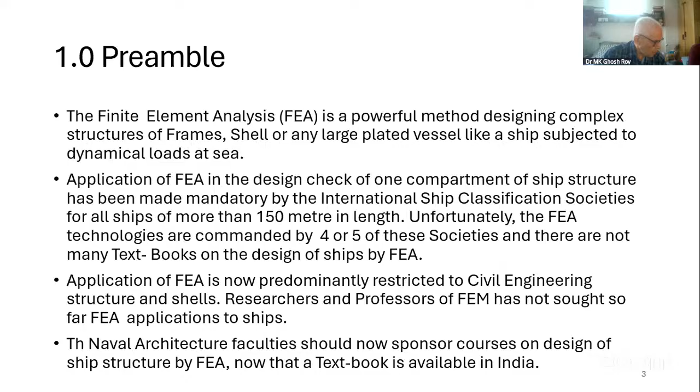Here, this is part of a deck plan of a ship. This is the after bulkhead, this is the forward bulkhead. This deck area has been discretized into rectangular elements. This is the finite elements.

Defining ship finite elements: to apply the finite element method to ship structure, we need to discretize the ship's plated body continuum into many finite elements, as shown in figure 1.1. Those elements are assumed to be structurally connected only at their corners, or nodes. This is the element, and these are nodes 1, 2, 3, 4. These adjacent elements are connected only through the nodes. The sides are free—so this is how the element is treated.

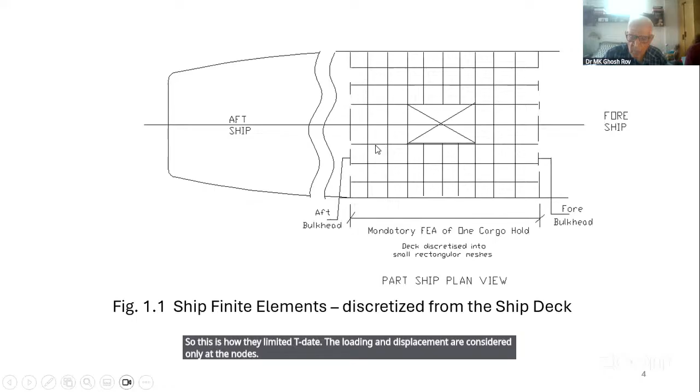The loading and displacement are considered only at the nodes. In this discretized condition, the stiffness of each node, called the stiffness coefficient in FEA technology, of every finite element is derived. We will gradually develop the method of deriving the stiffness coefficient. We are familiar with the beam theory in strength of materials—the beam is really a one-dimensional finite element. Similarly, each small rectangle of the ship deck, as shown in figure 1.1, is a two-dimensional finite element. In the following section, finite elements are discussed in some detail.

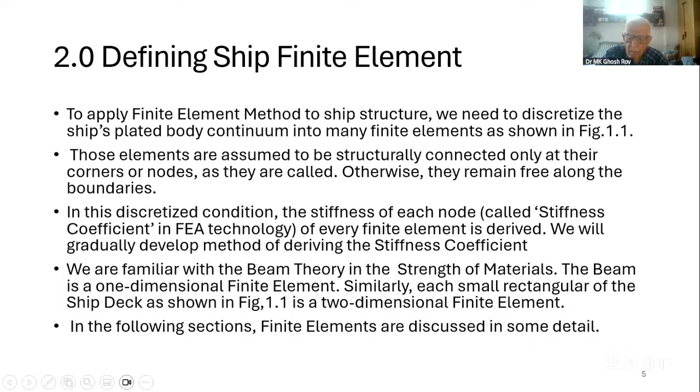This is a beam. It has a load here, but normally loads are transferred to the nodes. So this is a node—there are moment loads M1, M2, and R1, R2 are the nodal displacements at the nodes. This is a node, this is a node, this is a single element. So displacement is R1, R2, and moment load is M1, M2.

And connectedly, we have stiffness coefficients termed K11, K12, K21, K22. This is K11, this is K21—this is the stiffness. This is the load, but actually the force required to get a unit displacement, here a rotation.

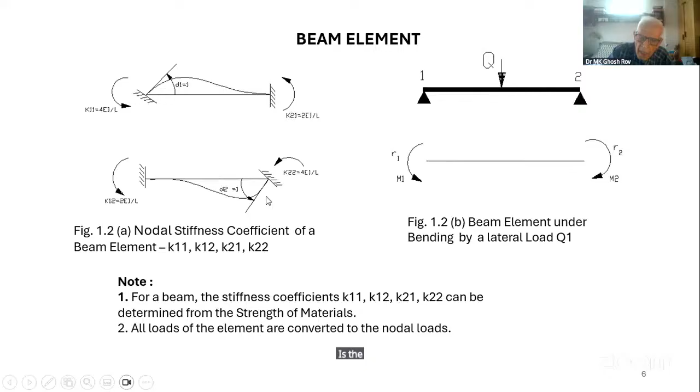So here is a displacement at node 1 and node 2, the displacement is D2, this is R2 really. With respect to the figure, I'm showing a beam element loaded by end moments M1 and M2, and undergoing nodal rotation R1, R2. Then the nodal stiffness coefficients K11, K12, K21, K22 are defined as below.

K11 is the load moment required at the beam end node 1 to rotate the same node by unit displacement. So this is the part stiffness at node 1.

And there is an additional load stiffness K12, the load experienced at beam end 1 while the other beam end undergoes unit displacement. This is as respective to node 1. And node 2 similarly.

K22 is the load required at beam end 2 to enable the same end to undergo unit displacement. And K21 is the other part at node 2, the load experienced at beam end 2 where the other end, node 1, undergoes unit displacement.

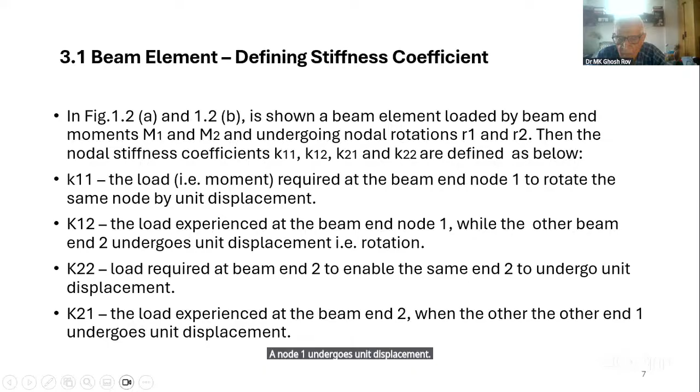So end rotation, the degree of rotation freedom, is called R1 and R2. This value is usually unknown. End moments are M1 and M2, this load we know. Nodal stiffness we know, but we can derive and know K11, K12, K21, K22. I'll show you afterwards that they can be derived, and by derivation we know them.

Degree of freedom at node 1, and also node 2, is 1. This degree of rotation is about how many axes each node can take, 6 displacements. Here I've got only the one moment, so 1 degree is there. Here also, M2, 1 degree of freedom.

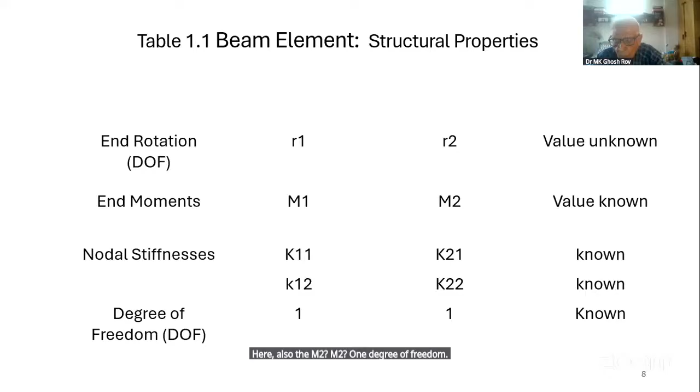Nodal equilibrium equation for beam element: when you multiply the stiffness with R1, we get the load here. And the part 1 of the stiffness and part 2 of the stiffness - this is due to the rotation of node 1, and this is due to the rotation at node 2. This equilibrium equation we write in the matrix format here.

This is the stiffness matrix, displacement vector, load vector. As you know, in matrix treatment, this is the multiplication, this is also multiplication. Rows into columns is this true. We'll proceed further.

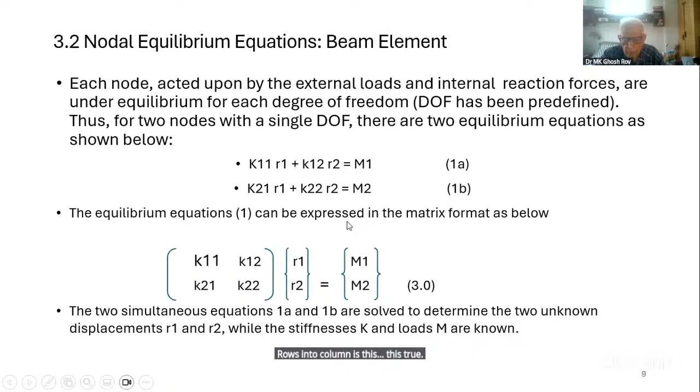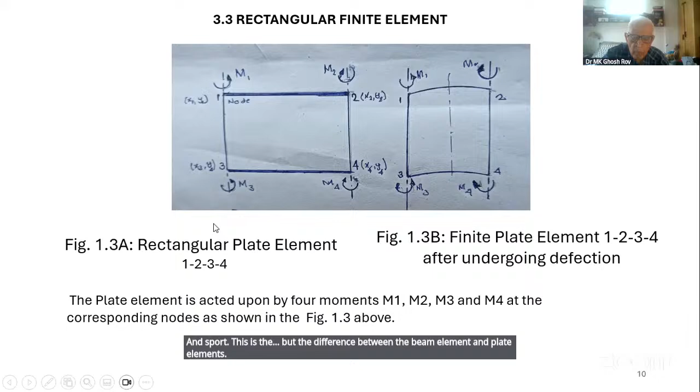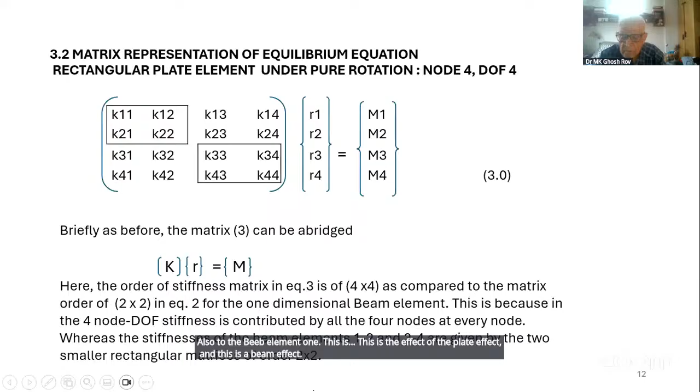Here I am showing in a matrix form. If it was 2 beam elements instead of a plate, this is the upper beam element, this is the lower beam element, and because of the presence of the plate, stiffness has transferred from 3 and 4 also to beam element 1. This is the effect of the plate, and this is the beam effect, for each node.

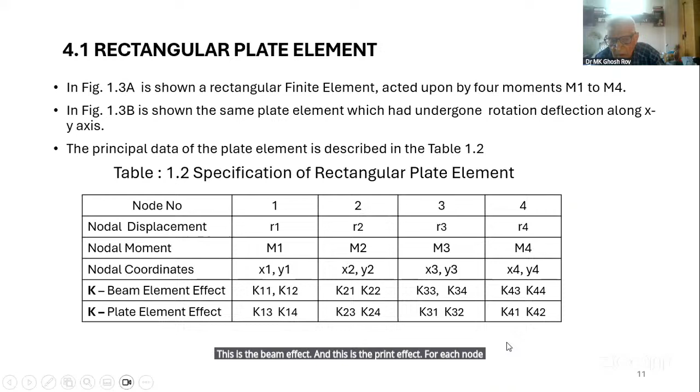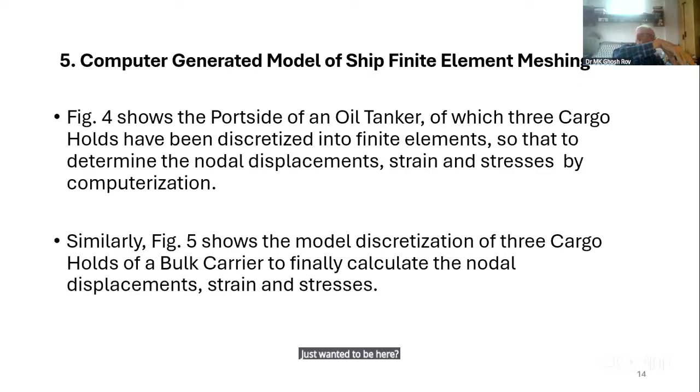This is the same thing I have said. Now my part 1 is finished, Vijay. Thank you very much, sir. One minute, Vijay, I have to go back. Part 1 is finished. Okay.

Okay, part 1, no, this is anyway finished. I will want part 2. Is there any interactions? You cannot, we cannot go back to the screen. Yeah, we can. Stop.

So, Mr. Dasgupta, is there any queries? Yes, sir. Thank you. Then I'll talk, okay.

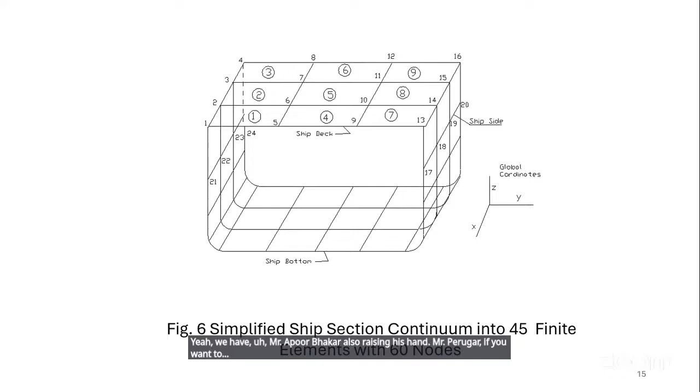Thank you, that's the mouse. Hello, okay. Yeah, yeah, we have got part 2. Yes, sir. Part 2 is the primary ship finite element, we will show. Yeah, Mr. Kaur and Dr. Sinha, we have, just, I'm talking now, give the lectures. No further question. Please go ahead, sir, please go ahead, yeah.

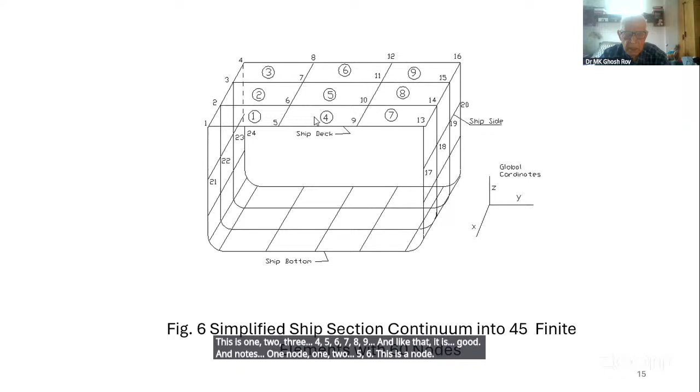This is the ship sections. A simple model I have made here: deck, bottom, ship side, ship side. We have discretized it in 45 finite elements. This is 1, 2, 3, 4, 5, 6, 7, 8, 9, and like that it is going. And nodes, one node, 1, 2, 5, 6. This is a node. This is element 4. Element 4 has 5, 6, 9, 10. Another element, and 4 nodes here.

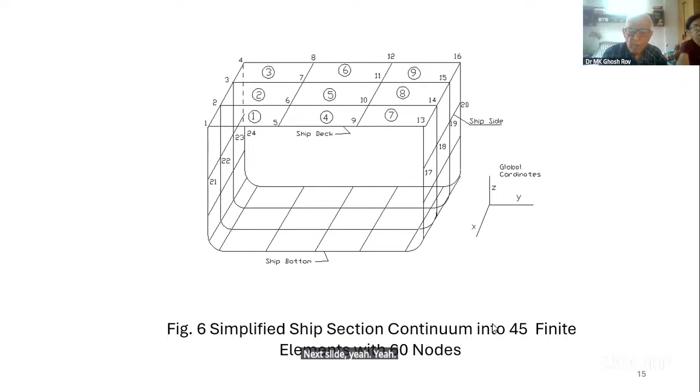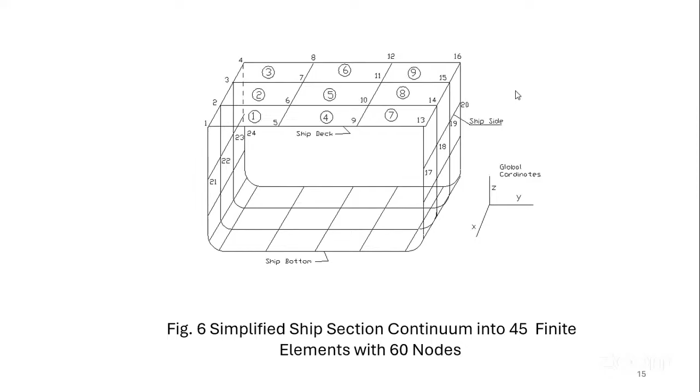Vijay. Vijay. It's not going to the next. Next node is, next slide, yeah, just 1 minute. Yeah. Oh, stop, no. Stop sharing is. Okay, no, it's not going. Okay, I'll directly do it. Huh? Yeah. No. Not.

So the same ship sections, a rectangular finite elements, 45. Deck assembly 16 nodes, two sides 32 nodes, ship bottom 28 nodes. Some of the nodes are common. We leave that, 60 nodes.

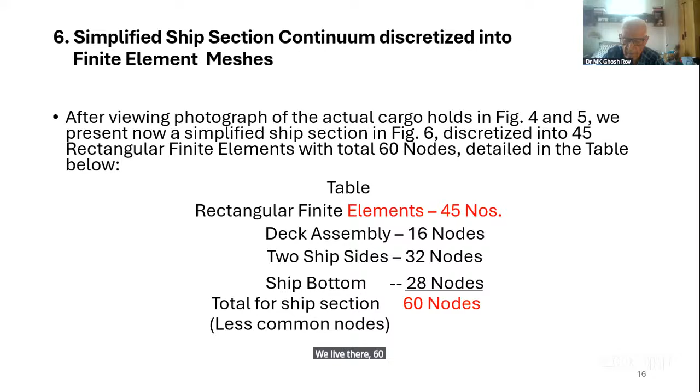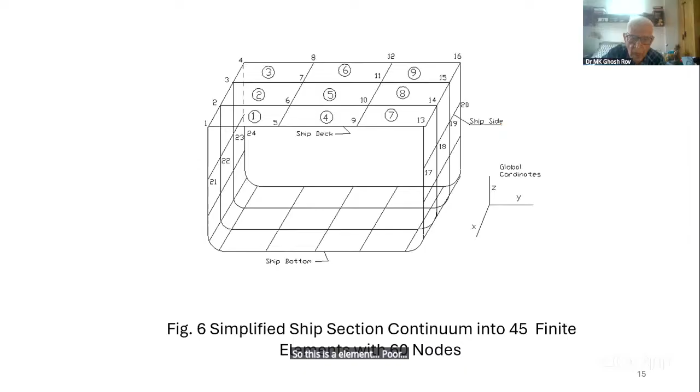So this is element 4. This is element 4. This is the element 4 we'll be talking about of this section. So this element 4 has got 4 nodes: 5, 6, 9, 10.

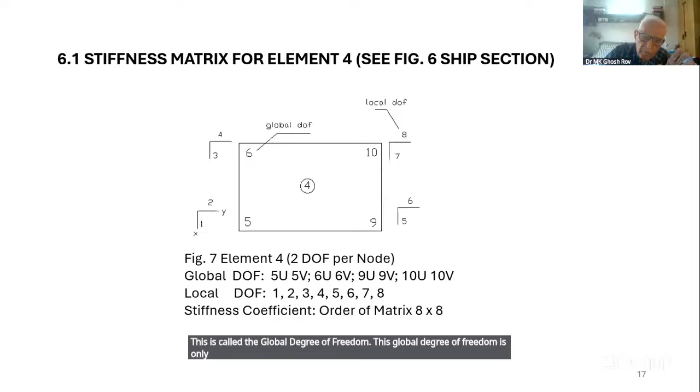This is called the global degree of freedom. This global degree of freedom is only serially numbered, but we have also, for calculations of the node itself, we have local axis called a local DOF: 1, 2, 3, 4, 5, 6, 7, 8. So here in a matrix form, this is the global degree of freedom, 8 degree of freedom.

Each node has 2 displacements. This is 2 DOF per node, so total 8 DOF, which is indicated by the local DOF 1, 2, 3, 4, 5, 6, 7, 8.

So here you can see that each stiffness is contributed from each node and for each DOF. Node 1 influenced by displacement of 1, node 1 influenced by displacement at node 2, then 3, 4, 5, 6, 8. So node 1 is contributed by the stiffness due to the displacement of node 8, DOF 8. So this whole 8 by 8 matrix represents the stiffness of element 4, K4.

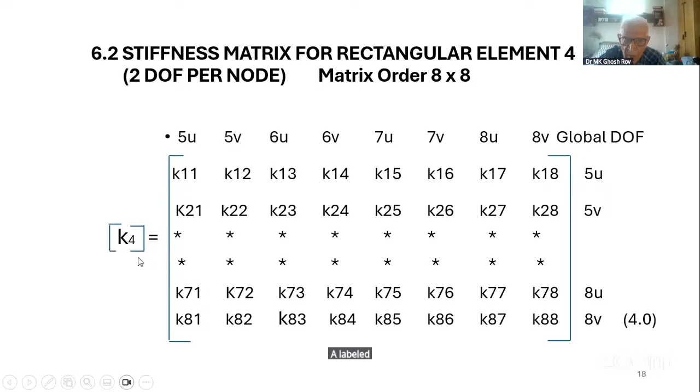Element 4, this is element 4, its stiffness is K4. And each point, there is a part of the stiffness, 8 in total.

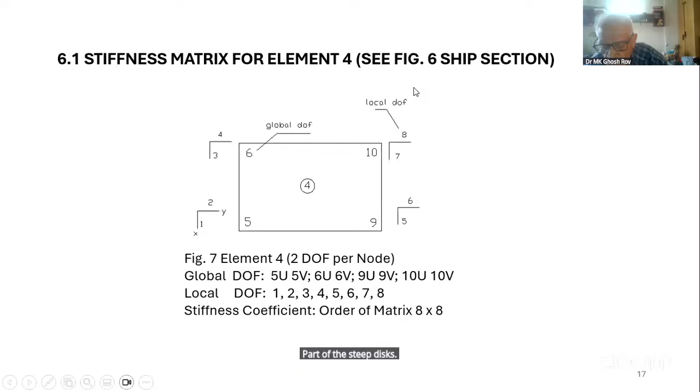Now in these discussions, we have got several functions, but it's important that here we are discussing displacement function N. Then we will have displacement function B, and stiffness coefficient already introduced, K. So N, B, and K are very important functions in the analysis of finite elements.

So here, displacement inside the element is in terms of the nodal displacements. Nodals, we have now recognized the nodes, the corners. So corner displacements, 4 corner displacements in this case, are a function N, displacement functions. So we can determine the displacement at any point if we know the displacement function, also called the shape functions, and the nodal displacements.

Since it's because of 8 degrees of freedom, the element displacement of a 4-node element can be represented with 8 constants. So here, displacement U in the x direction, V in the y direction. This is because of 8 degrees of freedom, 8 constants can be used. These are constants alpha 1, alpha 2, alpha 3, alpha 4.

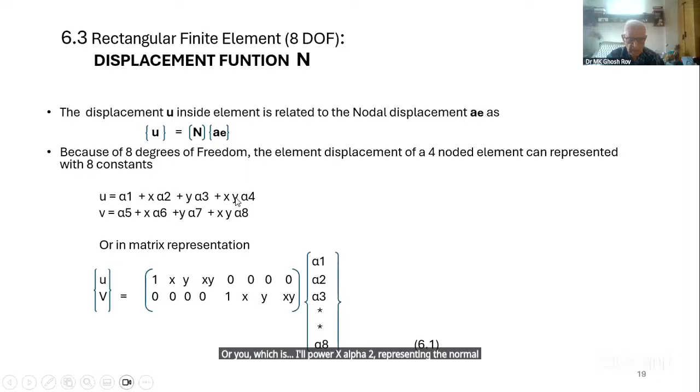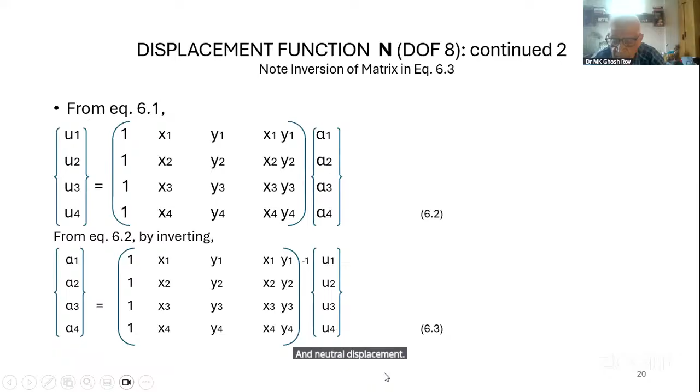So altogether, we have the internal displacement inside the element, the connection matrix here, and instead of alpha 1, alpha 2, we are writing this part. So U equals the connection matrix, this is the inverse matrix A-1, and this is the nodal displacement. Now this is also equivalent to N times A, which we showed in the first figure.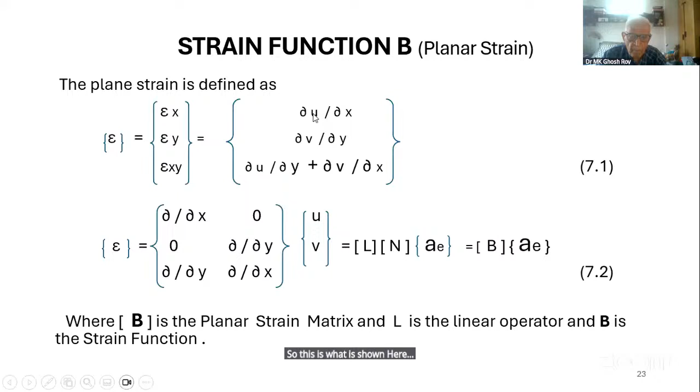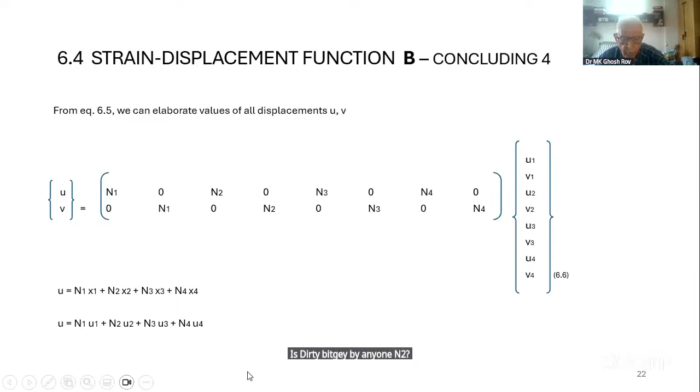This is u, shown here as u equal to N1 times the displacement function coordinate. So the derivative of u is the derivative of N1, N2, N3, N4. This gives the strain, and the derivative of N1, N2, N3, N4. The zero is only for positions because the column consists of u and v; the first line v is 0, and the second line u is 0, and shear strain is not required there.

So this whole matrix is called the B matrix, the strain matrix. So epsilon, this column epsilon, equals the B matrix times the nodal displacement. So from there we got the strain, which is B matrix times A, the nodal displacement.

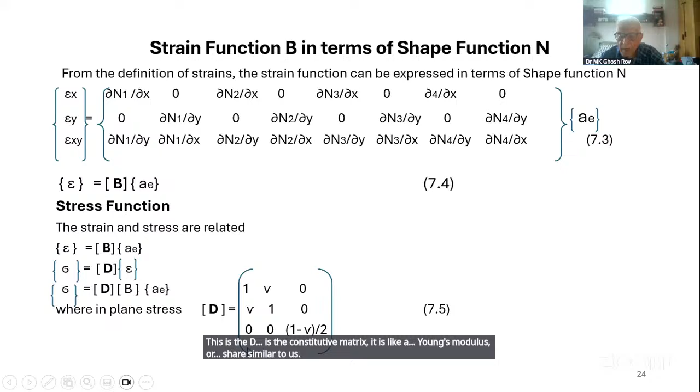We have finished part 2. Any clarification needed? We go back to part 2, we have cleared it, and we go back to this original. Anyone else for clarification?

You don't have to restart, just sit. So I would suggest that you go through the part on stress and strain from the matrix, which is very well appreciated. Please go ahead with part 3, sir. Okay, thank you. I shall have a go at the combined part, interaction, at the end of part 3. Thank you, sir.

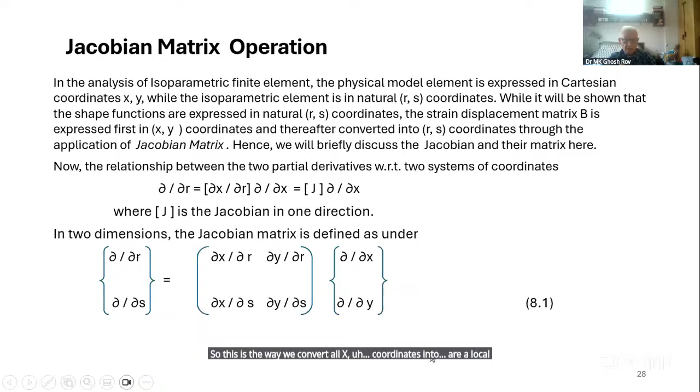So this is the way we convert all X coordinates into local coordinates R and S. Here, this is briefly written: del R, del S, del X, del Y. But we want to convert the B matrix, which is in Cartesian coordinates.

So the B matrix is written here in X and Y, to convert it into R and S. This is a requirement. For that, del X comes here, del R comes here, and it is inverted. This matrix is inverted, so the inverted matrix is defined here. I would not go into details. This is divided by the determinant, and this is the way to convert it. We did not go here just now.

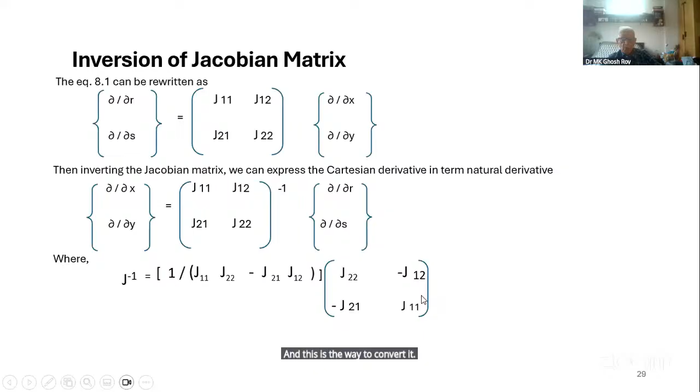So here you see there, a shape function in xy naturally is given by inversion. This expression gives the derivatives in x and y and the derivative r and s. This is the Jacobian matrix.

So this rectangle is converted to the natural rectangle by this J, and inversion of J is this. So the inversion of J is here, we converted here. This is multiplied, we get B, which is in Cartesian coordinates, into RS coordinates. All coordinates here are R and S.

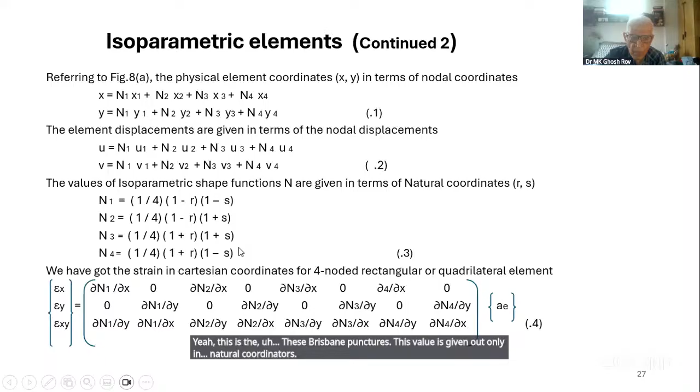So values in N in R and S is given, and before, they are converted to R and S values. Here, this is the displacement functions. This value is given only in natural coordinates. So Cartesian coordinates B has been converted to B in RS coordinates here. Then it is simple to derive further. So we will stop here.

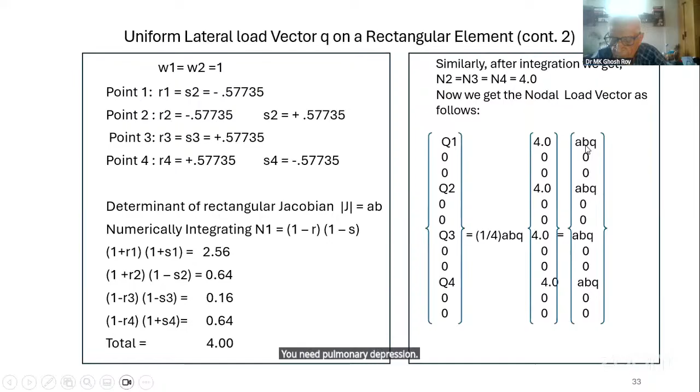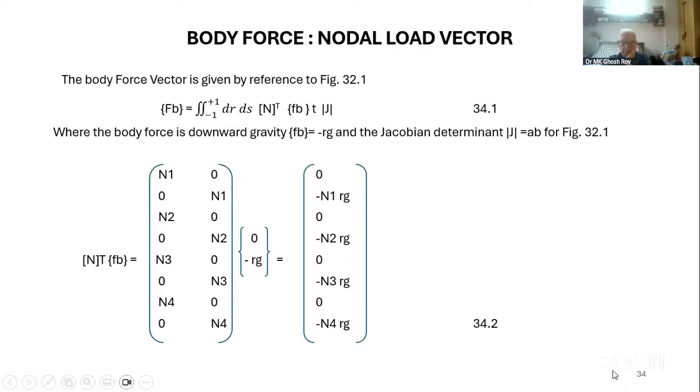This is the numerical integration at 4 points we integrate. So this is only integration, N1 we are integrating. So 3 other shape functions N2, N3, N4, the same value you will get. And finally, body force also, it is a constant, tab 1/4 the value, tab RG, tab RG, tab RG, tab RG. It is minus, a negative direction, downward.

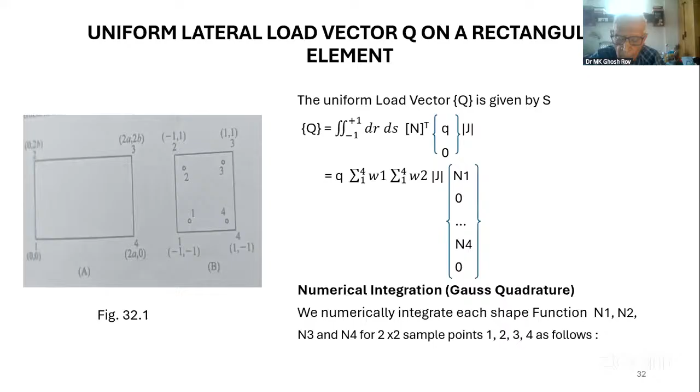This is one page I missed. How to determine stiffness coefficient. We have developed derivations of N, derivation of B, N shape function, displacement functions, and B is the strain function. But stiffness coefficient we have not, and load function also we have not. That's a little difficulty. I said I'll do later.

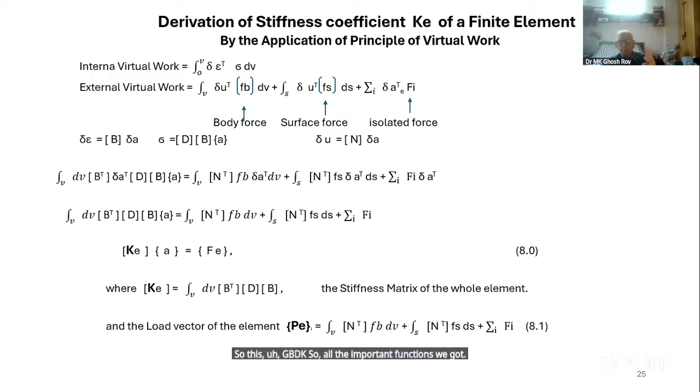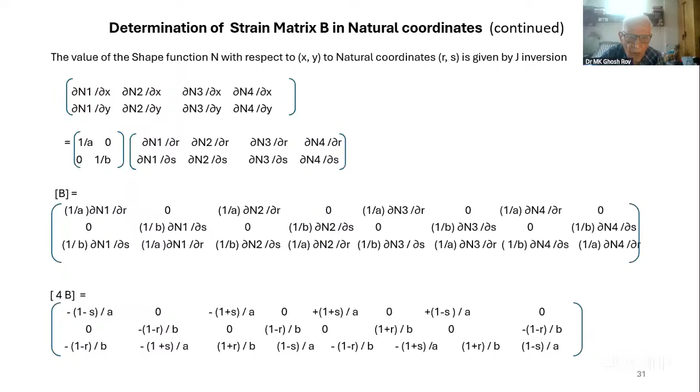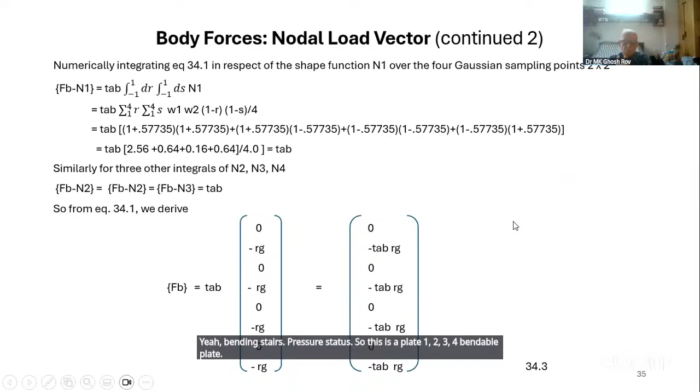So at each node in a plate, there was a lateral deflection W, and theta x is the rotation, and theta y is the rotation. That means this point goes up and down W, then theta x is the rotation here, and theta y is the rotation here. But a little difference is there.

Theta x is dw/dy. This is the deflection in this direction, and this is the deflection in the vertical direction, this part. So this x axis bends like this, all this.

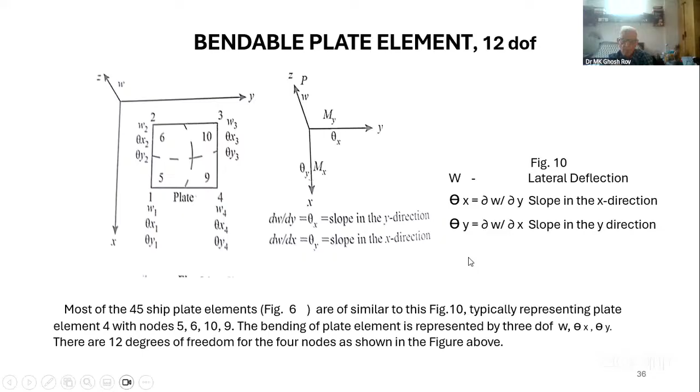So isoparametric property - to do the plate elements, we have to use isoparametric properties of plate elements. We have shown the functions before. X is the nodal coordinates, and any other coordinates in terms of the 4 nodal coordinates, 1 to 4. Y also - Y inside the plate, this is the nodal displacement, XY plane, and this is a lateral deflection.

This corner just goes up and down. And this is the rotation, X direction rotation, Y direction rotation. So dw/dx is the rotation in Y, with Y here, double derivatives, and derivative in Y - single, double.

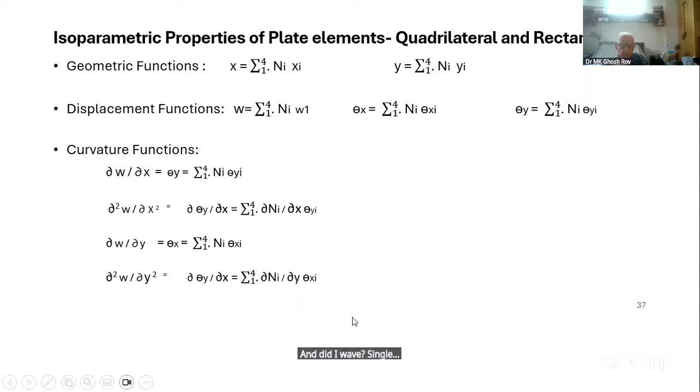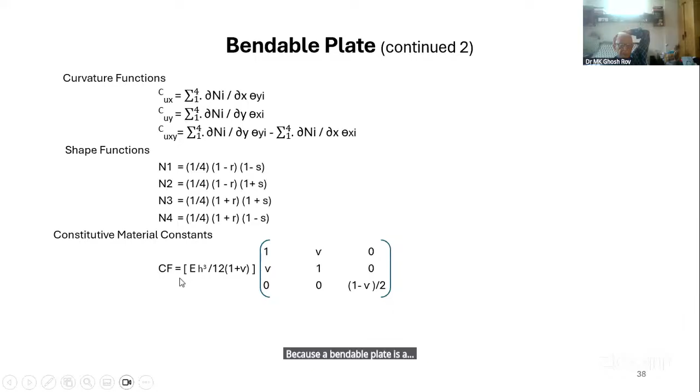So when you have a plate, we have rotations, flexure rotations. But classification today also requires that shear strain has to be taken into account. So if the full deflection of the plate is theta y or theta x, it is divided - this is the flexure part and this is the shear part. This is the total deflection: flexure part dw/dy, and this is the shear part.

Now shear strain is phi y - it constitutes of flexure and... no, sorry, this is the total part. This is the shear part, this is the flexure part, and total deflection. Phi y strain, shear strain, is a flexure strain plus total deflection.

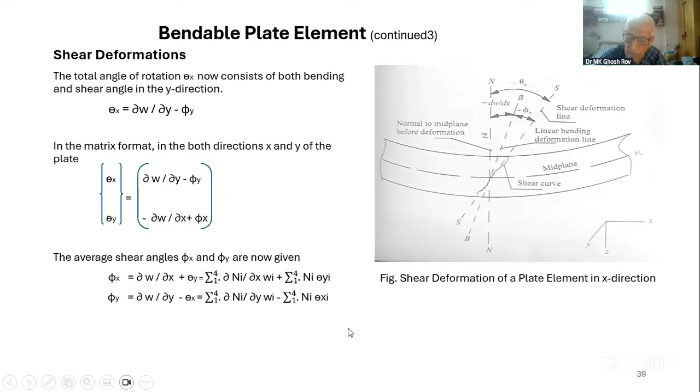So for epsilon, the strain - as you know, for plane stress epsilon has three parts: epsilon x, epsilon y, epsilon xy. Here, these three are there, plus phi x shear strain and shear strain y. So this is not plane, this is a plate.

So components at each node: vertical deflection, theta x rotation, theta y rotation, and phi x and phi y are converted again into this strain. I'll go to the next slide.

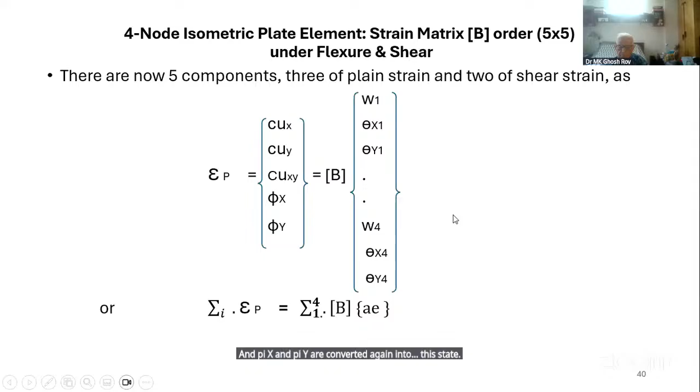This is the rotation theta y - sorry. This represents, multiplied by this. This is theta x, multiplied by this, rotation in the y direction. This is a shear.

This is converted from shear strain in terms of the displacement functions, so we don't have to represent independently. This is multiplied by W1 and Ni theta y - we get the shear, both shear strains expressed in this one. Using the isoparametric properties, we have converted from shear strain to displacement functions you can use - this displacement function, shear.

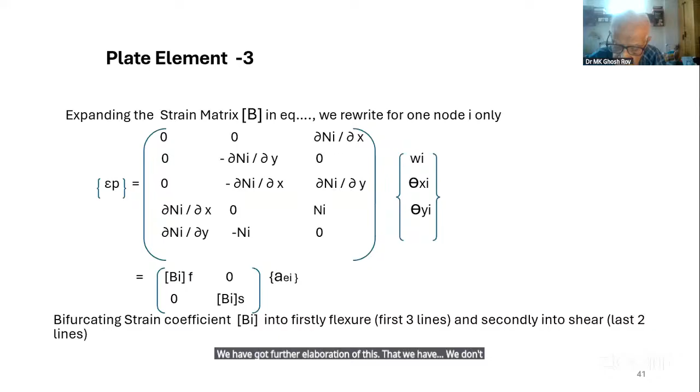So this is a two-part flexure strain. B is a strain function, but this is the flexure, this is the shear. We have got further elaboration of this that we don't present here, except this. This is the flexure part, this is a flexure part, shear part. This is the constituent CP, plate constituent, and this is flexure, this is shear strain.

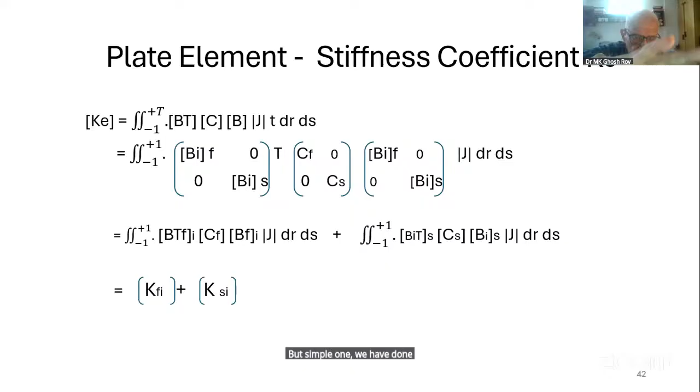This is two parts, and K, the stiffness - K is stiffness due to flexure, and stiffness due to shear. We have not gone beyond this because you need really elaborate calculations, which can be done on a computer only. But a simple one we have done in the book - it's shown done without a computer.

So the last part - ship. These are the processes relevant to ship's analysis. We have seen it in 3 parts. We have dealt with ships, but the processes as applicable to the ship we have shown in part 1, part 2, part 3: drawing the ship finite element, then primary ship finite element analysis, then part 3, isoparametric analysis as applicable to ship.

Here, a ship's plate, transverse stiffener, longitudinal stiffeners - we have taken an element from here, 1, 2, diagram is not very good, 3, 4, 1, 2, 3, 4. This is a stiffener. So plate elements 1, 2, 3, 4, angular stiffener 3, 4.

And plate DOF - plate DOF: 3 flexures, 2 shear, 5. Total, you have got 20 DOF.

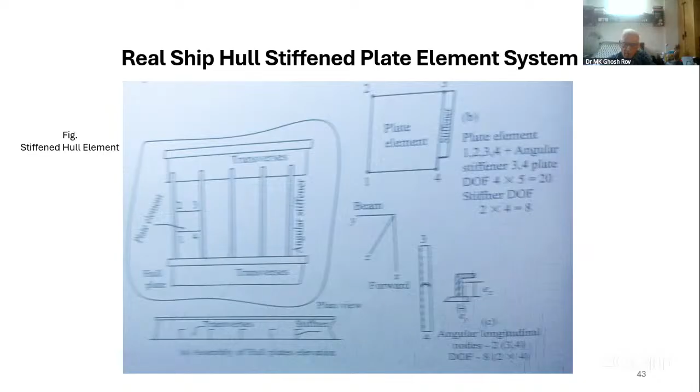Here is the 3-stage stiffness solution of a real ship hull element. The composite stiffness of the ship hull element consists of...

The first stage solution is the planar stress membrane, 8 DOF, UV. Planar membrane is UV. The second stage solution is the bendable plate, 12 DOF.

Third stage: W, theta x, theta y. Each element is W, theta x, theta y. And the stiffening member has 8 DOF. That means at node 3 and 4, we have got lateral deflections and axial displacement.

The beam can axially elongate or contract, U. Lateral deflections, which you usually call beam vertical deflections, and bending, theta x. In natural beams, your lateral deflection gives you a curvature, dW/dy.

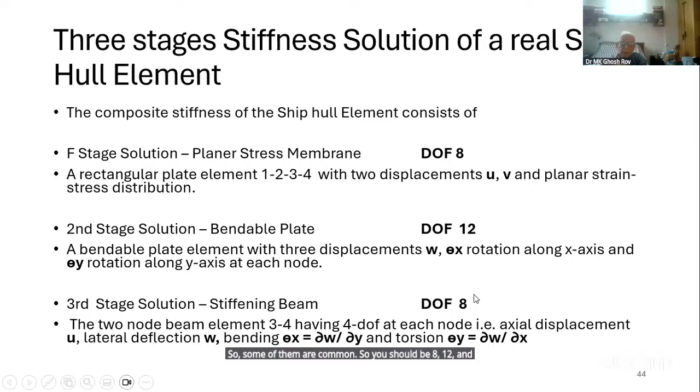For the beam, you can apply the strength of materials, so a complicated calculation is not needed.

This is the axial force. This is the W vertical force. This is the bending. This ZZ is the torsion. Torsion is theta y. Theta y is the torsion. And this is the bending slope.

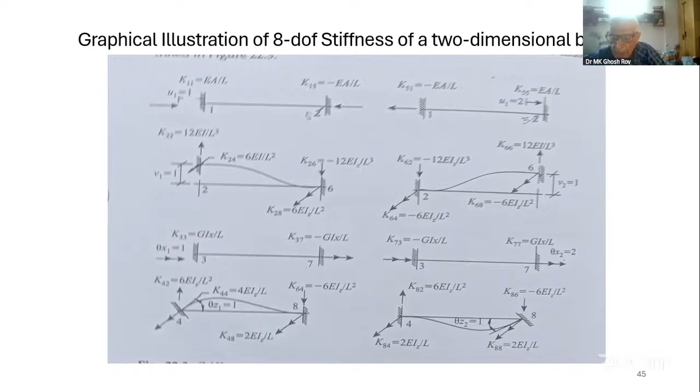From there, for the beam, we got this stiffness matrix, this total, which I have shown in the diagram. If you convert it to the stiffness matrix, this is the stiffness matrix. These are all well known to us: EA/L, 12 for vertical, these things for bending.

This is torsion. This is also again bending. I'm not going to go into details - this you've covered in strength of materials or slope deflection theory.

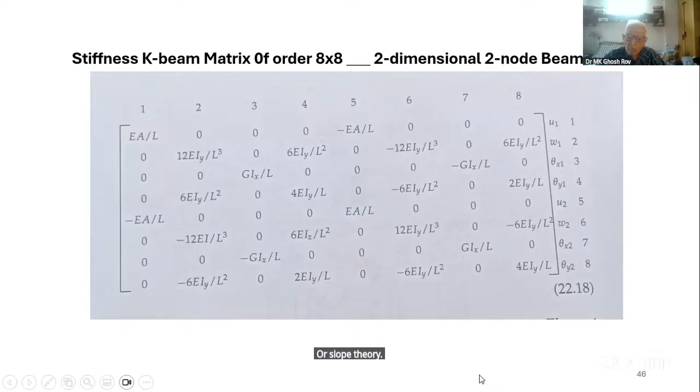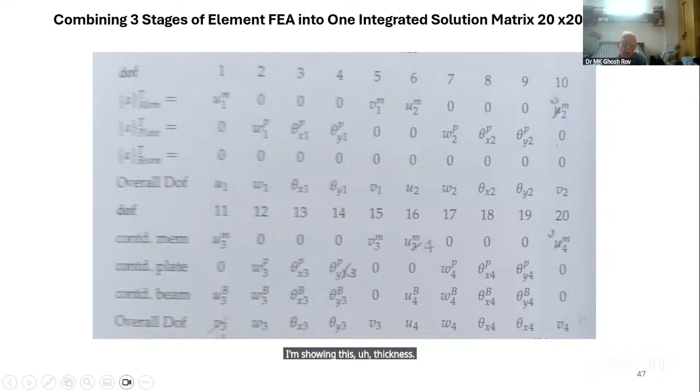So far, we have talked about the elements only, finite elements. That means we broke the ship's continuum into numerous elements and treated them as load versus stiffness.

And element 4 is connected to nodes 1, 2, 6. So we have to collect them and write down the stiffness matrix for the whole structure.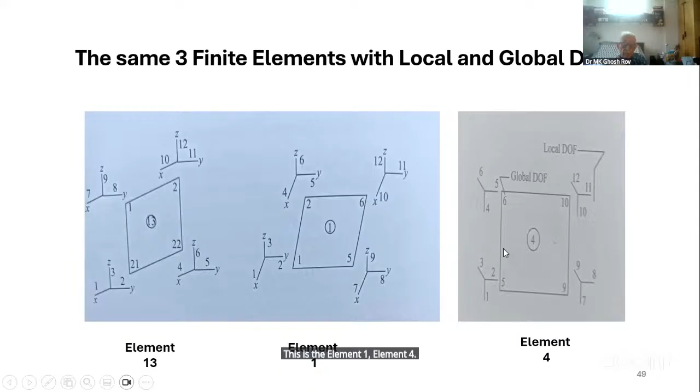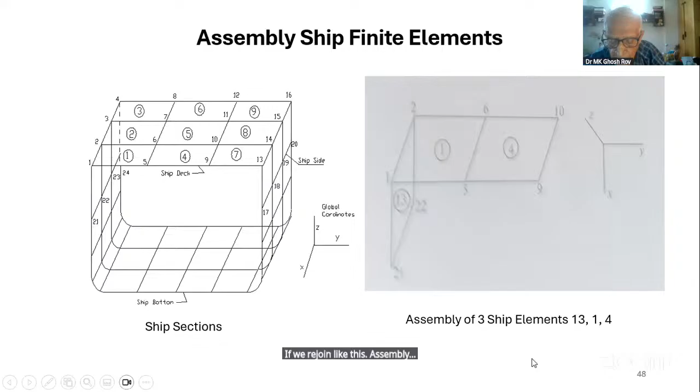These three, if joined like this in assembly, the stiffness element will be this way.

You see, each element, like element 13, is 12 by 12 matrix.

Then this is the one, element 1 and element 4. We have to match nodes 1 and 2 here, and this element 1 and 2 here. But it gets shifted because of the two other elements shifted.

And again, this is 5 and 6 common between element 1 and element 4. So these three elements have been assembled this way.

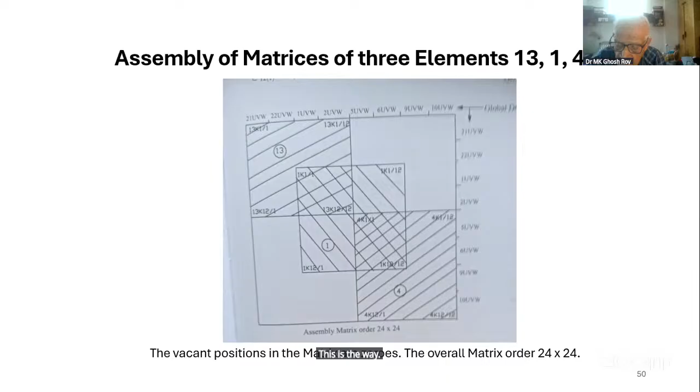So Dr. Govinda Sinha says something about classification. Classification rules is not the aim of the paper - we are talking about finite element analysis science here. But however...

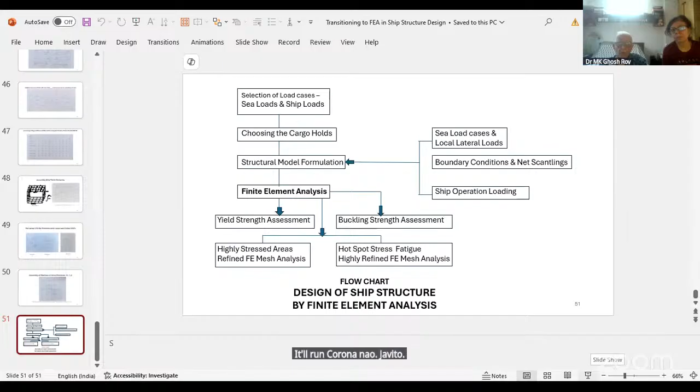Can you see it now? Yes sir, we can see it.

You can go to the next slide, sir. How many more slides, sir?

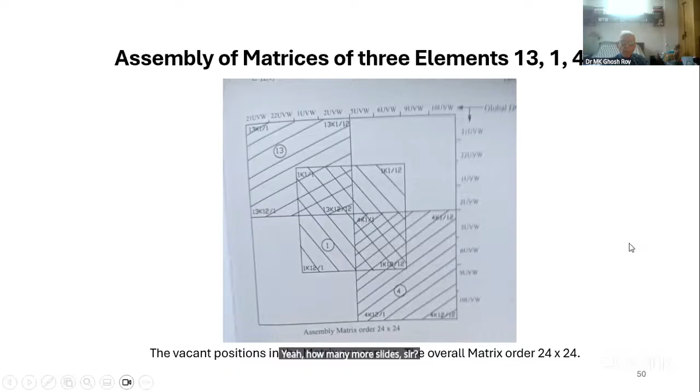So this is the process, common to the classification society: sea loads, ship loads, choosing the cargo holds. These three cargo holds we have chosen, structural model formulation, sea load, boundary conditions, ship operation loading.

Finite element analysis. After the finite element analysis, we have to get in the design format, the yield strength. If you stress in one direction, it does not give. We have to, at this point, get the total strength, which is the yield strength sigma 1, sigma 2, sigma 3. Then buckling assessment, and then high stress areas.

Where stress concentration is there, openings and all, then hotspot areas, welding spot, welding joints, and all up and down for few millimeters. You get a hotspot stress, and at that space vibration is there, so fatigue strength is affected.

So this is the overall background of the application of finite element analysis of the ship, of course in compliance with the classification society rules, as they are the approving authority. But this paper and the book is for institutions, it is not yet for developing commercial software. That work is yet to be done. It is for the institutions, I have made it single-handedly.

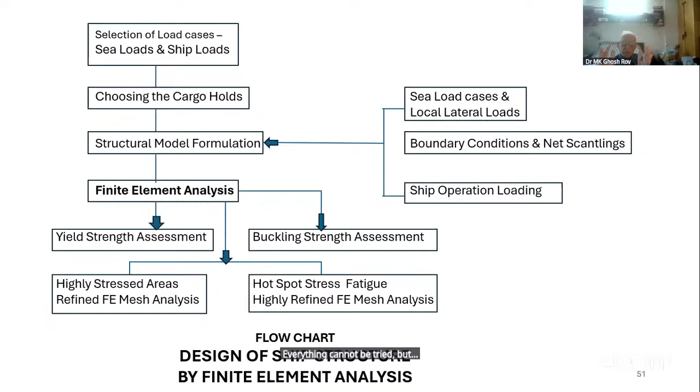Old man naturally, everything cannot be tried, but the basic science of finite element analysis I have given in the book, and one should read the book to understand. In one presentation, you can appreciate and have only a glimpse of it, but we cannot do the work by the projections.

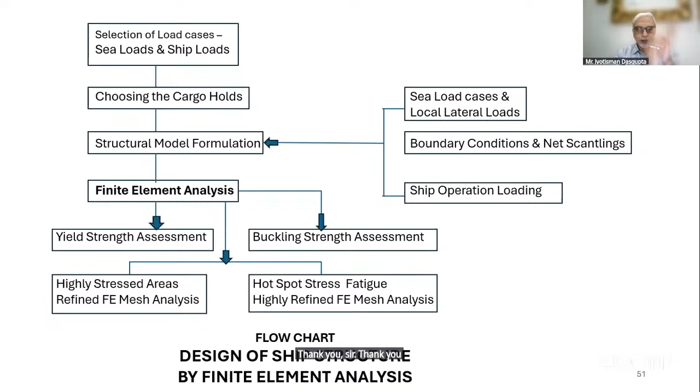Okay, thank you sir. Thank you very much. Thank you very much. You have virtually covered it. Stop sharing then.

So you have virtually covered the entire mathematics and physics of this solver, the finite element method solver, which is the crux of the entire finite element method. You have covered the finite element matrix solution, mathematical formulation and theory, the shape function concept, the Jacobian matrix and matrix inversion, strain matrix, and many other aspects of the finite element solver. So with that, I congratulate you sir for having made this book the theoretical foundation of the finite element method.

In the commercial domain, the finite element method has applications in many areas and it has progressed quite a lot. So I would think that it is time for us... Am I audible to everyone? Yes, audible to me.

Thank you sir. On the basis of your presentation, there are very important aspects on the pre and post processors, the load matrix application, and then the final stress values and what can be accepted. With that, sir, I would request any questions which may have come to mind, or any comments from any of the practitioners of the finite element method in ship.